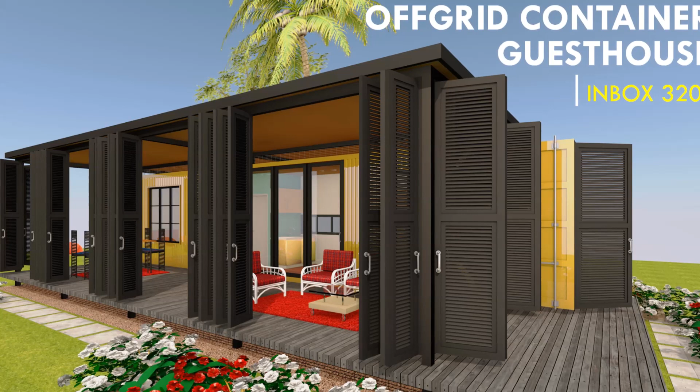This video brings to you a modern off-grid container guest house designed from a single 40-foot high cube shipping container. Stay tuned for inspiring minutes of amazing good design.

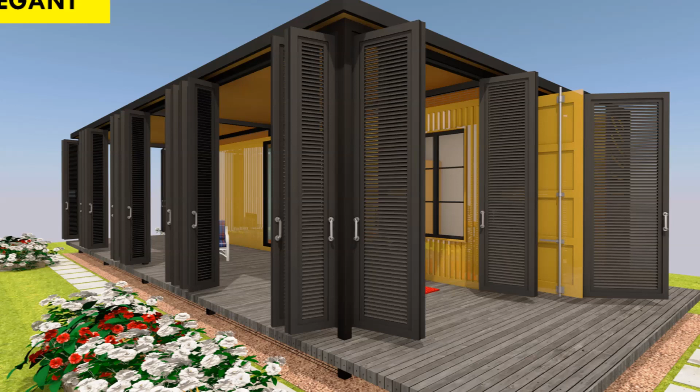Welcome back. This video brings to you Inbox 320, a shipping container guest house made up of 320 square feet of shipping container space plus additional outdoor living space. In this presentation, we explore foundation design, interior design, exterior design and finishes, roofing, landscaping, and eco-friendly fixtures that are ideal for an off-grid guest house made from a shipping container.

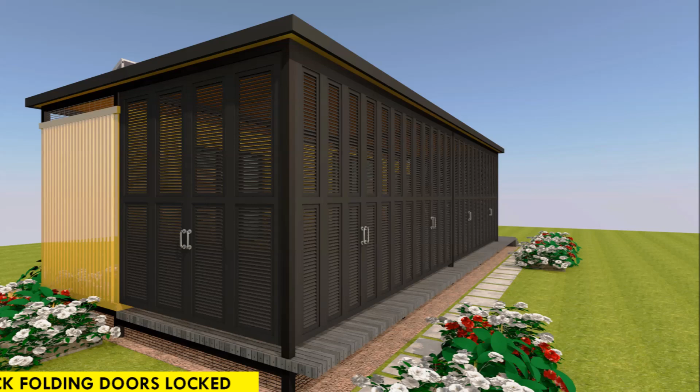So let's get started. We have ingeniously managed to accommodate the following salient features.

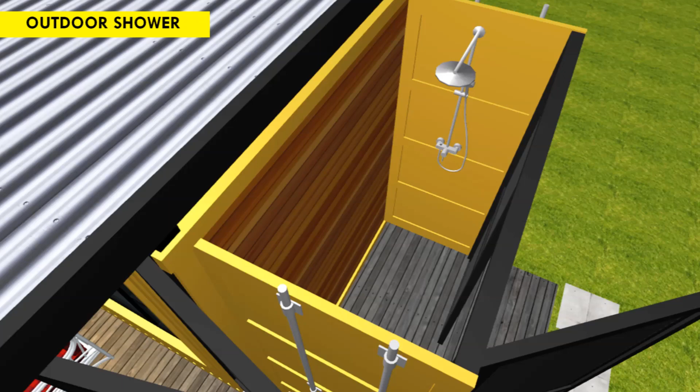We have two bed spaces or bedrooms, with fully fitted wardrobes on either ends of the shipping container. We also have a full bathroom that is shared. We have an open plan indoor living space, a small kitchenette and a generous outdoor living area. In this design, we've retained the original cargo doors, which we've managed to fit out a nice outdoor bathroom.

This outdoor bathroom is secluded with nice dark painted louvered doors.

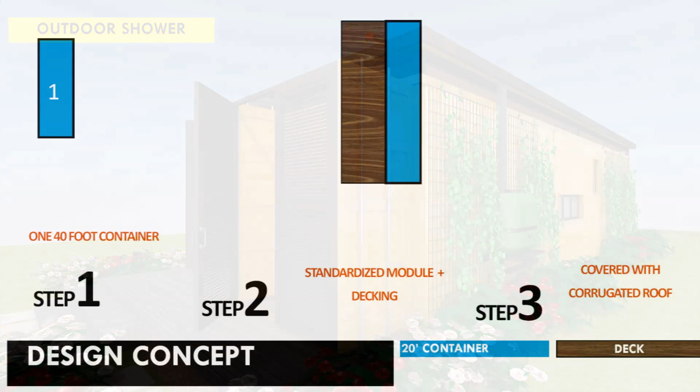This 40-foot shipping container cabin sits on a steel pier foundation to elevate it off the ground. This light foundation permits continuous airflow to keep the container cool, and also helps keep the container from moisture, thus enabling easy plumbing.

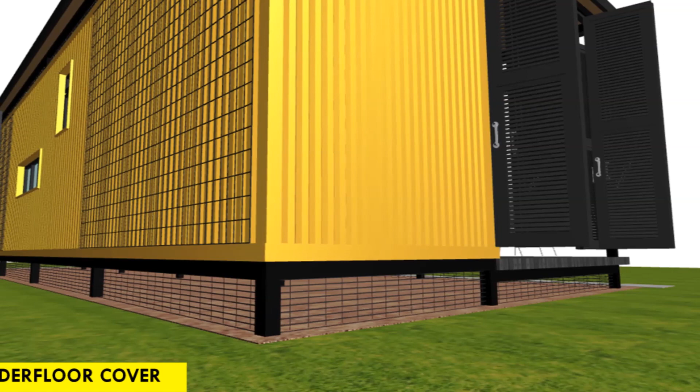The underside space is fitted with a rust-proof mesh wire to prevent birds and animals from perching underneath. For more information, you are encouraged to go through our previous presentation on the top 5 foundation types used in shipping container homes and buildings to understand more on foundation design.

The elevated foundation provides a good position to construct a 2.7-meter wide deck that has been given in this design. A deck is a quick and easy way to add extra living space to complement the compact living space inside a shipping container. In this cabin, the main entrance opens onto a large elevated deck off the front edge, greatly extending the compact living space.

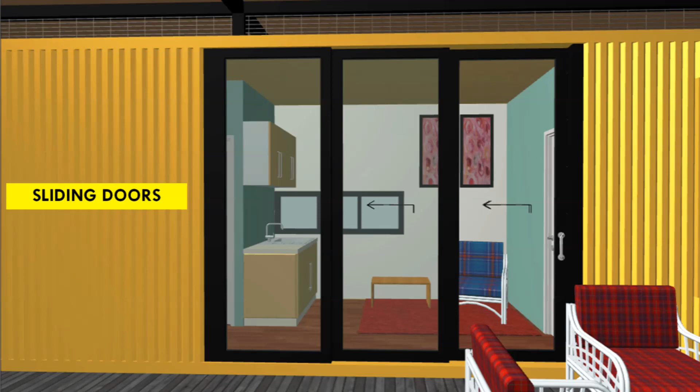The cabin front has a nice, welcoming and generous full-height sliding glass door for access and also for maximum daylighting, connecting the cabin seamlessly to the outdoors and the surrounding landscape.

The entire deck is fitted with black painted, louvered and lockable folding doors to enhance privacy when the cabin is in use, and also for maximum security to the cabin when it's not in use. You can therefore lock your cabin and leave it safely.

To complement the industrial look of a shipping container, this guest house has been given a minimalist design to enable us to make the narrow space inside this shipping container feel surprisingly spacious.

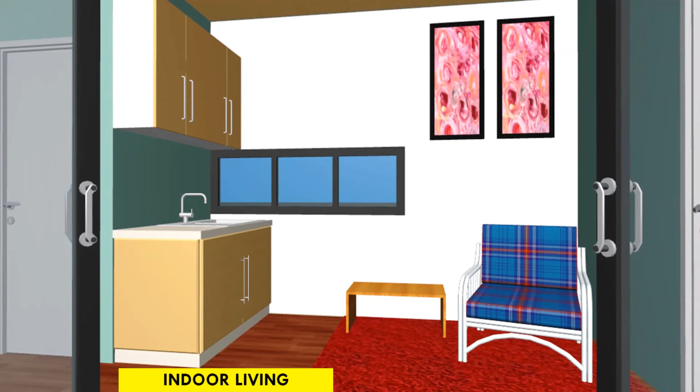What have we done? The interior of the cabin is lined with an appropriate insulation material depending on the climate of where you want to build. This design would be very ideal for tropical climate.

Without insulation, the cabin would be like an oven in summer and freezing in winter. Insulation is also essential to prevent condensation, which can corrode the container and cause mold formation.

You are encouraged to watch our previous presentation on 8 ways to insulate a shipping container house for more understanding. Ensure all the electrical and plumbing works are fitted out before lining the interior.

Furniture choices should also be made with space saving in mind. You are encouraged to use multifunctional transformative furniture and other space-saving furniture ideas such as Murphy beds, sofa beds, pull-down tables, stackable chairs, foldable chairs, and any other furniture that you find appropriate. Feel free to check out our previous video on space-saving furniture ideas for shipping container homes for more insight.

In this design, the kitchen backsplash and the bathroom walls can be covered with a similar material. This repetition of material use makes for a nice cohesive interior design that unifies the space and makes it appear bigger and brighter. For eco-friendly finishes, consider using bamboo plywood. Bamboo is renewable, durable, and a good material that can be used on both the floor and the walls of your shipping container cabin.

More importantly, this project was designed as an off-grid shipping container guest house, and therefore the message of environmental sustainability is at its forefront. It is adorned with several eco-friendly design elements such as, firstly, reusing a one-trip shipping container for a new and permanent use as a habitable space. In this case, as a guest house, it's the best and optimal way of recycling.

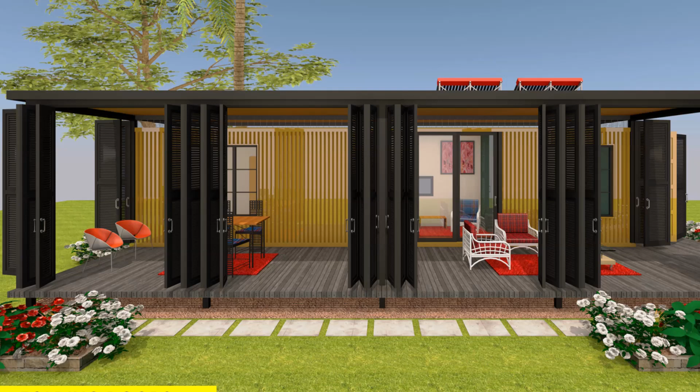Basically, we call it upcycling. Reusing a single 40-foot shipping container upcycles about 3,500 kilograms of steel and enables us to save over 8,000 kilowatt-hours of energy that would have been used to melt it down.

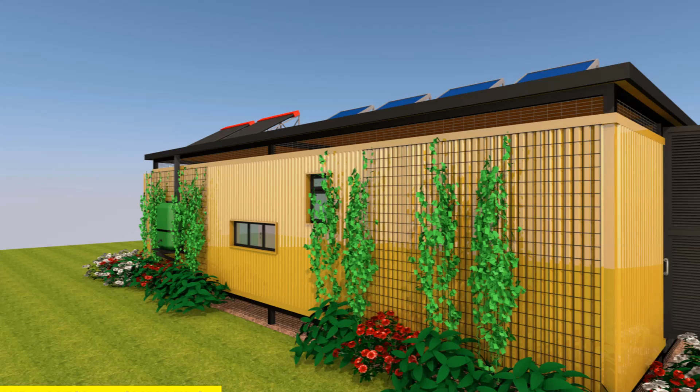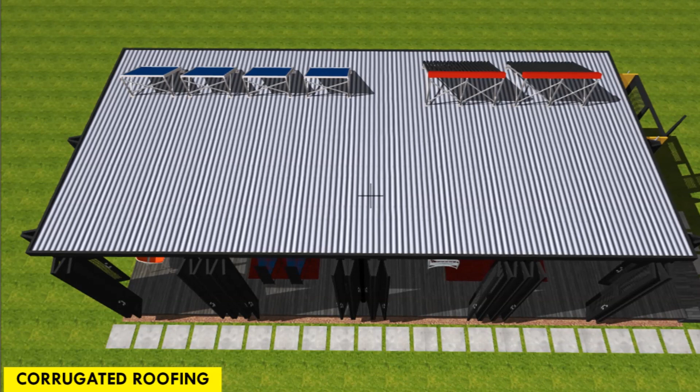Secondly, if you are toying with the idea of constructing this particular cabin and you live in a region that receives more than 6 hours of sunshine, then consider installing photovoltaic panels on the roof to generate electricity from solar to run the cabin. You are also encouraged to consider installing a solar water heating system.

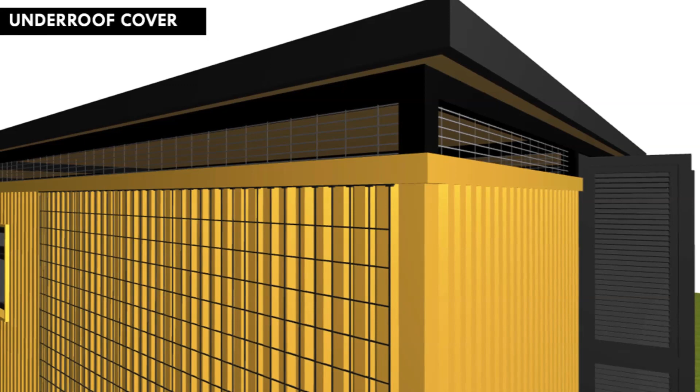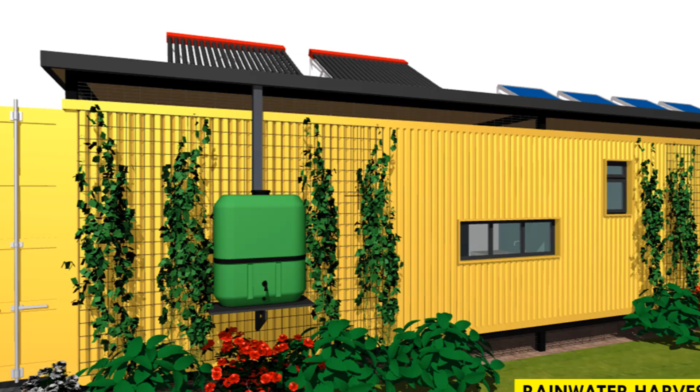Another green idea on this design is that the deck and the container are covered with corrugated steel roofing, which is elevated above the containers to protect it from direct sunlight and inclement weather. The under-roof space is fitted with a rust-proof mesh wire to prevent birds and animals from perching. The roof also acts as a rainwater catchment surface to collect rainwater for non-drinking uses of the cabin.

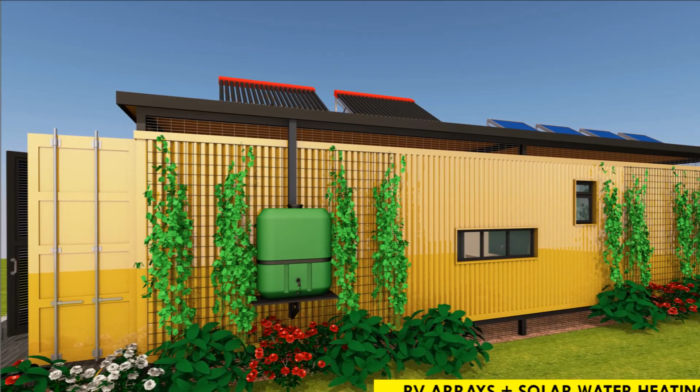Another green idea we've managed to encourage is to cover off the large and bare walls of the container with a mesh wire welded onto the exterior of the shipping container to accommodate vines and climbers, which will help introduce a bit of greenery and further insulate the exposed container walls from direct solar radiation.

Another idea you can explore in this particular cabin is that all the water from the shower and the sink can be captured in a grey water storage tank and later used to irrigate the garden and the flowers around the shipping container cabin.

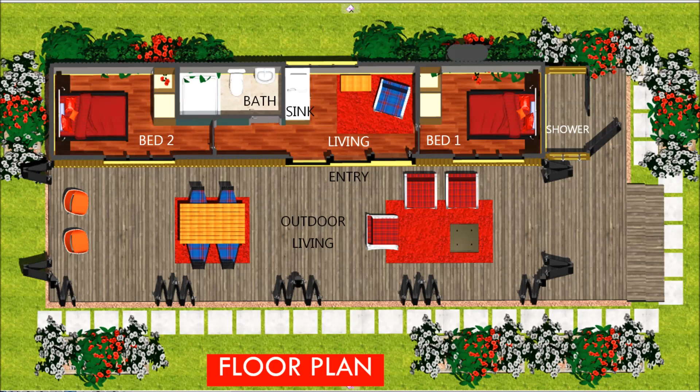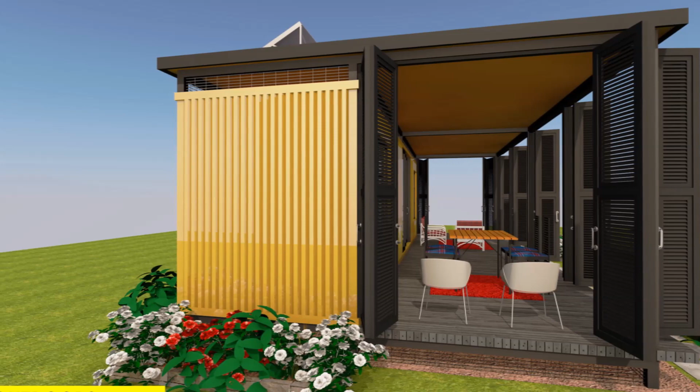In addition, consider using composite decking as an alternative material to conventional timber. Composite decking is warm to the feet and also resistant to the toughest weather conditions, which will make it a great low-maintenance alternative to timber and any other material, making it suitable for an off-grid container cabin.

For economic sustainability, consider having the cabin listed on a vacation rental platform like Airbnb to earn some extra income and also for self-sustenance.